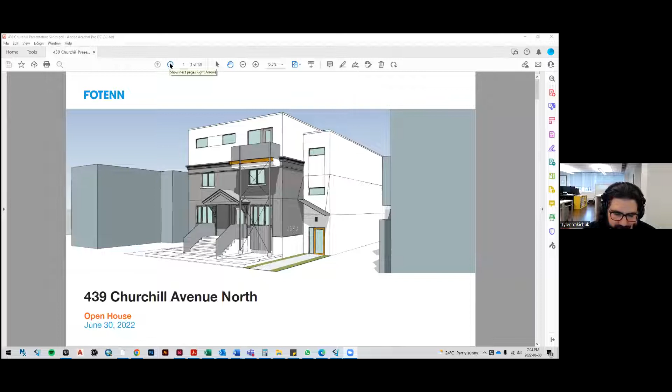Okay, so I'll keep this brief, and considering how few people there are in the room, I'll also maybe skip a slide or two. I'm sure everyone's a little familiar with the context, but okay. So good evening, my name is Tyler Yakichuk. As mentioned, I'm a planner with Fotenn Planning and Design, working on behalf of Grepo Developments. In addition to myself, we have Lisa De La Rosa, also with Fotenn, Chris Benez, our architect, and Isabel DePoe, our developer. I'll be walking you through the planning and policy context, as well as the design for the proposed development at 439 Churchill Avenue North.

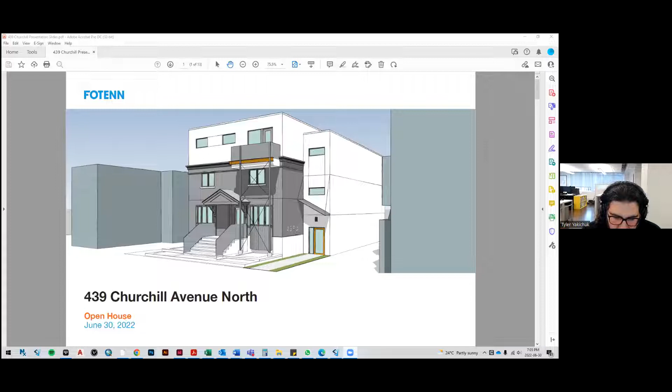The proposed development looks to redevelop the subject property as a 3-story mixed-use building that will contain 4 residential units and 2 commercial units. Those 2 commercial units, which are presently existing on the site, will naturally be retained.

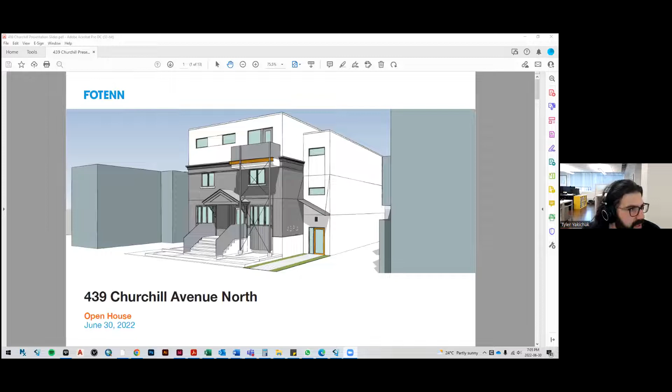So I will quickly go through our context. The property fronts the east side of Churchill Avenue North and has frontage of approximately 15.25 meters. The subject property has an area of roughly 461 square meters and is about 600 meters in radius from the Dominion Rapid Transit Station and 630 meters from the Westboro Rapid Transit Station.

The property is presently improved with a 2-story building containing 2 commercial units and a detached 2-car garage at the rear of the property, which is shared with the abutting neighbor to the north. In addition to the garage, 3 more stall parking spaces are available at the rear of the building presently.

The property directly to the north of 439 Churchill has recently been approved for site plan control to develop a 6-story mixed-use building. The side of the proposed development that abuts the north lot line to 439 Churchill includes no balconies and will be, among other things, a servicing and garage area for the new project. In other words, there will be no privacy concerns for either development.

The property to the south is a mixed-use building that includes commercial at-grade and additional residential uses at the rear of the property, which is not unlike what we're proposing this evening.

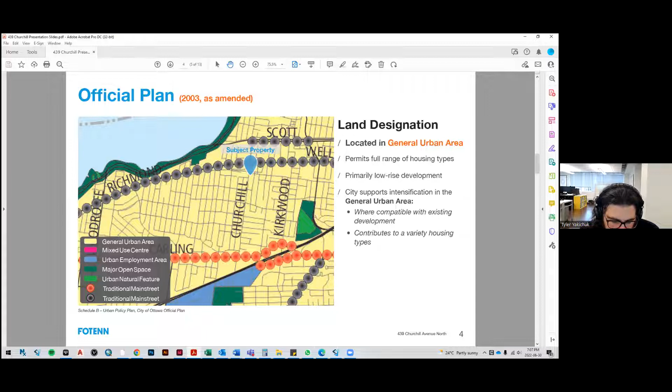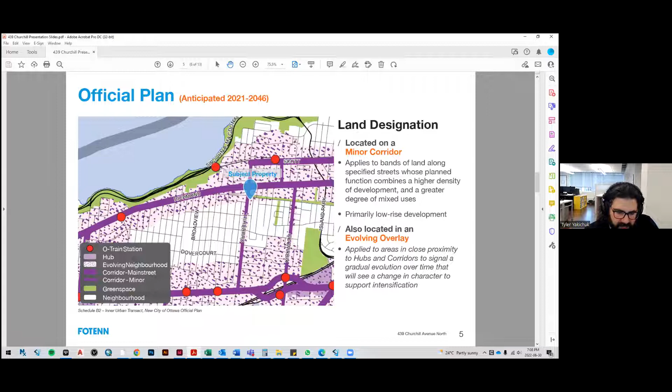However, specific relief from two built form provisions will be sought at the Committee of Adjustment. That relief will be discussed on the next slide.

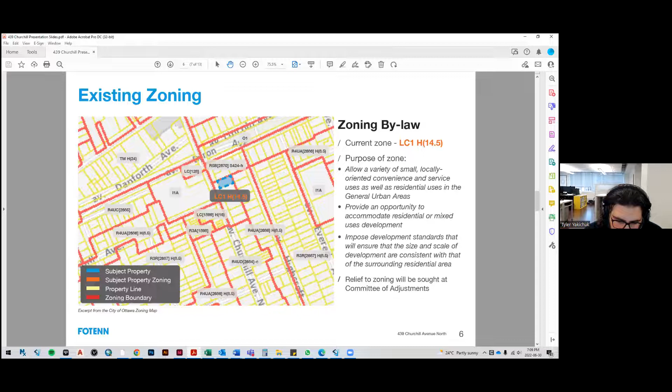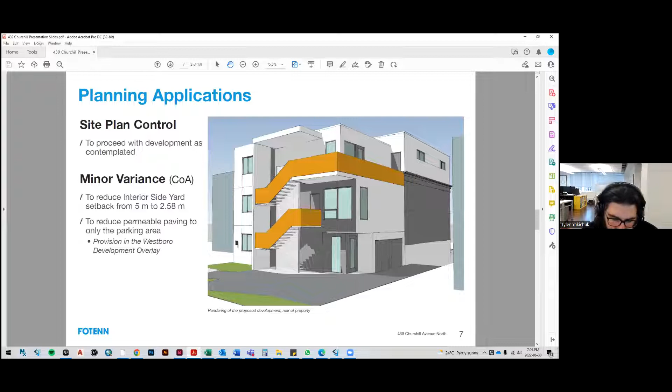The planning application we're here to discuss tonight is specifically the site plan control application to build the proposed development as conceived. In addition, after receiving our first round of technical comments from the city today, we will engage the Committee of Adjustment for a minor variance to reduce the interior side yard setback and reduce the provision requiring the entire paving surface to be permeable. These variances will be discussed a little later.

So the proposed development. Here's a site plan for the development. We are looking to redevelop the property as a 3-story mixed-use building. The building will collectively house the existing 2 commercial units, as well as 4 new residential units. This will include 3 units at the rear of the property, as well as 1 above the existing commercial units. Included will be 2 parking spaces and 7 bicycle stalls.

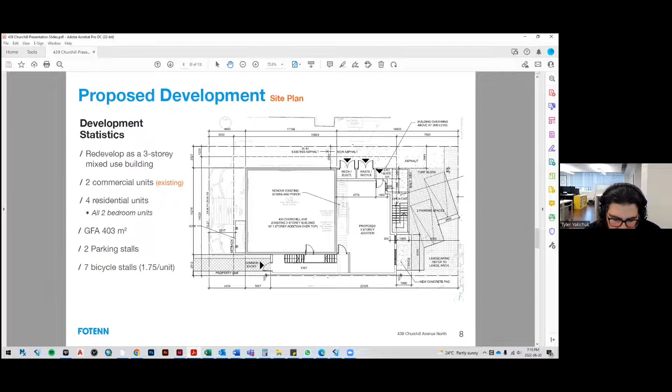Looking at the elevation drawings, you can begin to get an understanding of what the redevelopment will look like. First, the west elevation viewing from Churchill - you can see the additional story on what the existing building will look like, as well as the new balcony. On the east elevation, showing the rear of the property, you can see the rear entrances to the units, as well as the balcony spaces each unit has.

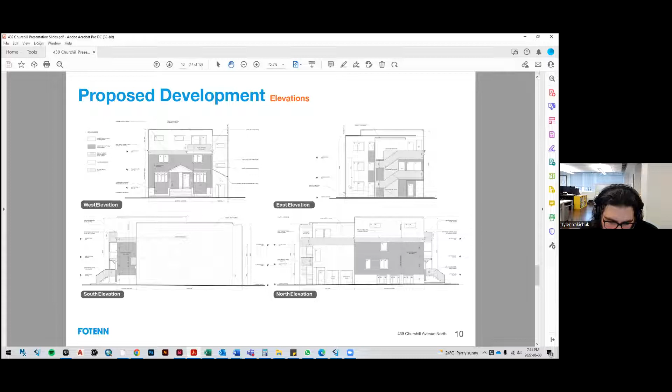On the north elevation, which is the side that abuts the property proposed with a 6-story development, you can see where the servicing doors are located. Finally, on the south elevation, which abuts a neighboring mixed-use building, you can see there are no windows, so as to retain privacy for residents of both buildings.

So back to the relief we are ultimately seeking at the Committee of Adjustment. As mentioned earlier, we will be seeking relief on 2 provisions: a reduction of the interior side yard from 5 meters to 2.53 meters, and a reduction in the required permeable surfaces. We believe the reduction in the side yard setback is appropriate, given that it's an existing condition and that both this development and the proposed development next door have limited any potential privacy concerns between the two buildings.

With regard to the permeable surface provision, the drive aisle leading to the permeable surfaced area in the rear is the only non-permeable surface on site. We believe this reduction is appropriate, as a great effort was put into retaining water on site, and the proposed landscape plan would broadly achieve that goal.

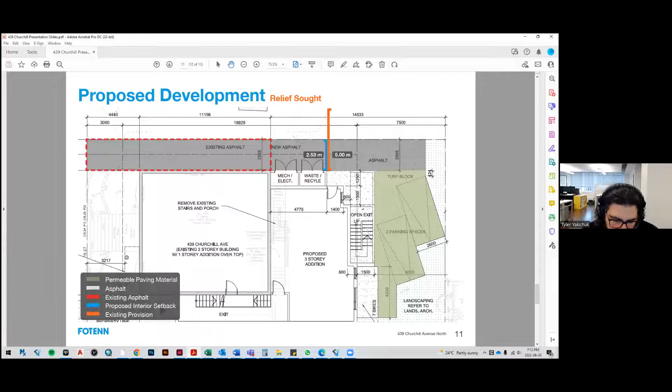So that is our presentation, and we'll be happy to answer all the questions you may have. Thank you.

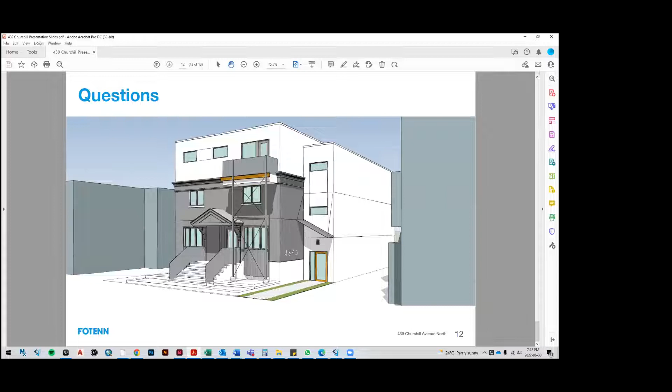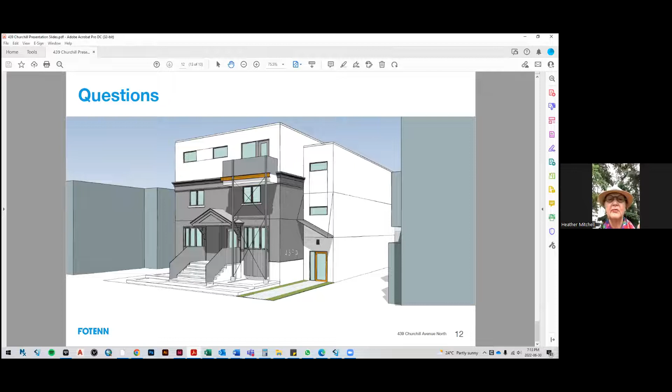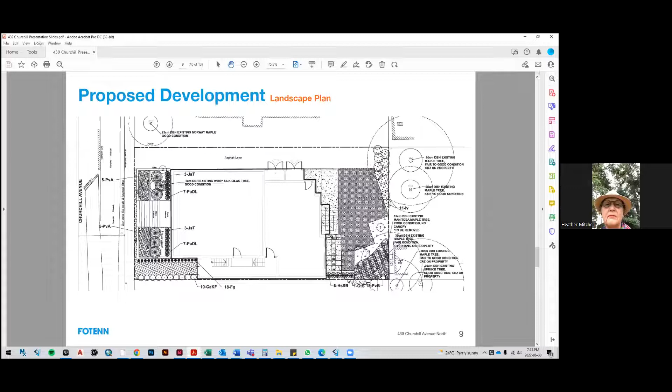I can also speak for a bit and ask for some clarification if you need some time. No, first of all, can you hear me okay? You're good? Yep, we can hear you. Okay, that's great. Tyler, can you show me - I guess we're most concerned with where it abuts the neighbors on the east side, behind the building. Do you have a view of that? I guess this might be the best image showing that, or if you go to the photo we have of the street view, I think you could see the existing building.

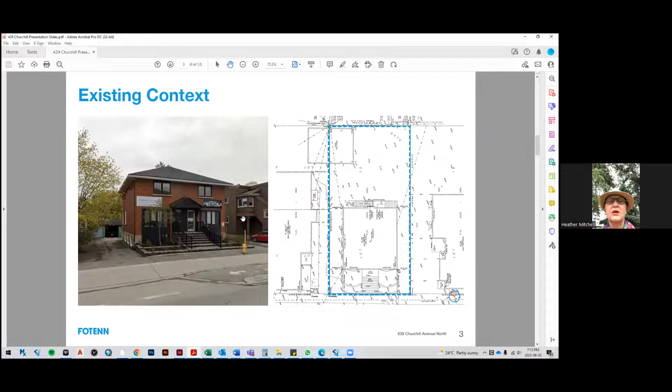If you go down one, the next one down, you see the existing building on the east side. You're not looking at the north side where the 6th story is, you're looking for the one on the south side. I want to see where the building abuts with neighbors on Highcroft, at the rear of the property. Yeah, that's the one.

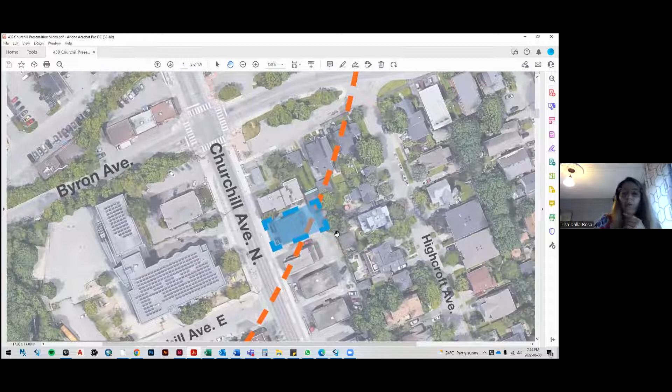So you don't have any renderings for that? Nothing. We have a rear elevation, but we don't have something that shows it other than the landscape plan, which is a sort of schematic from the air. Okay, because that would be really helpful to envision what neighbors are going to look at.

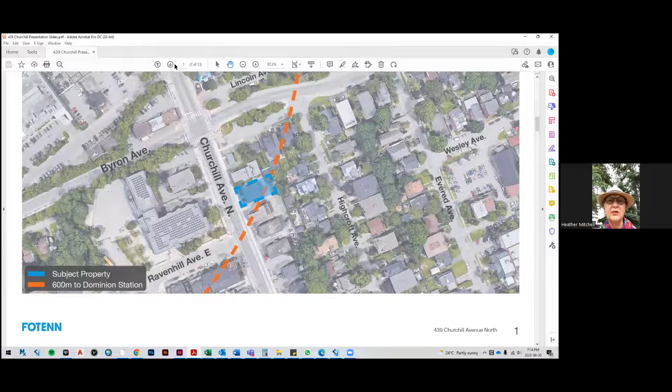But what I was hearing from you is that you're going to retain some trees and some greenery in the back there. Yeah, the existing trees are not being touched. Going back to the landscape plan, if you go back up one, right here you can see 1, 2, 3, 4, 5 trees that will offer some privacy.

Yeah, I've stopped my video because I'm pinching it open and I don't want you to see my nostrils.

So yeah, that's what I thought, that looks good. Trust me when I say there are 5 larger trees that should offer pretty good privacy. The canopies look to roughly cover the majority of the building.

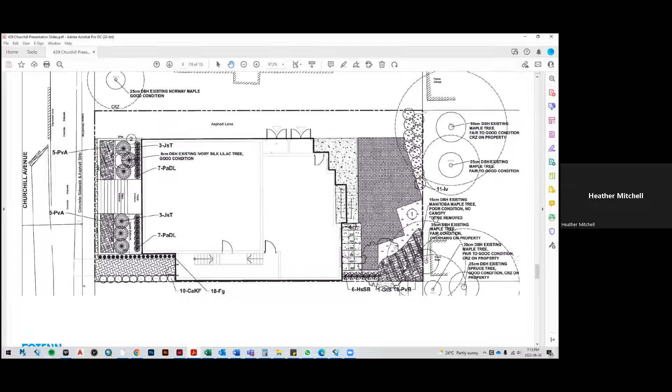And since this is already asphalted and the neighbors would be used to this building being commercial anyway, we are respecting the rear yard - there's no setback reduction with that addition coming into the back. The permeable parking, as much as it's part of zoning, is something the developer is very keen on doing, just because it will help water get to those trees more than the current asphalt does now.

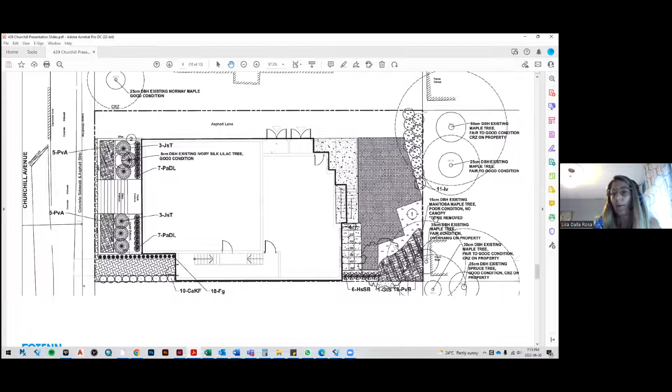The developer is here now, and the intention is for those parking spaces to strictly be for the commercial tenants. The apartment units would not have parking, so those spaces would be more on a temporary basis for people with appointments at the commercial space or for employees. So the idea is that it wouldn't become a parking lot 24/7 in the back there.

So for the residents, how many apartments? There are 4, and no parking, so they're going to be using LRT, and then there's 7 bike parking spaces added. Oh good, that was my next question about the bike parking.

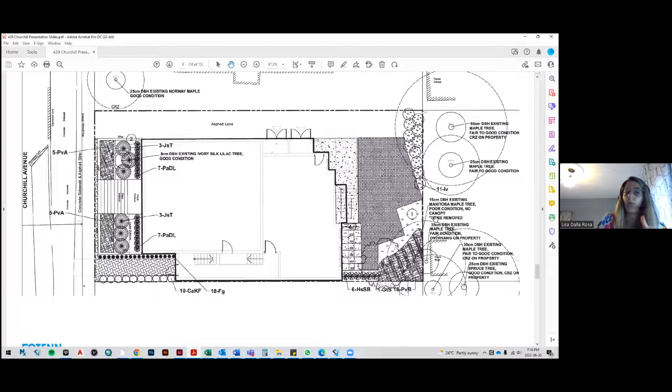The garbage is on the side of the building, abutting your neighbor there, and it's enclosed as part of the building - it's built in, so it will be rolled out, but it's internal to the building and not just a bin in the back that's fenced or something.

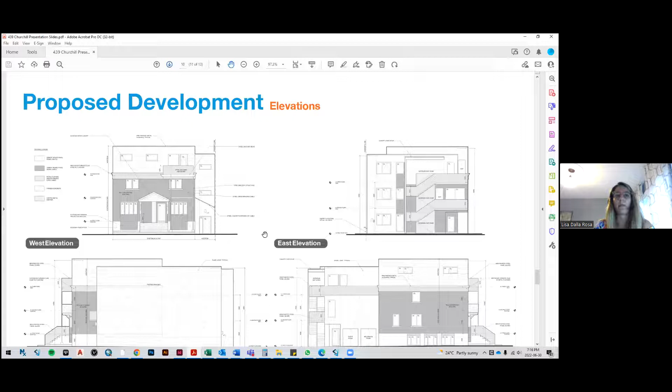And you've told me there's no rooftop terrace, no balconies, again for neighbors on Highcroft? No, there's not - well, actually if you go to the elevation, one up maybe, yeah, the back - I guess this east elevation is what's happening in the back. So there are balconies and staircases in the back that would back onto that Highcroft property.

But with those trees at the back as well, it's only one tree being removed, so that canopy is going to be mostly intact. Okay, no, that sounds good.

No, but this is very important. Also, if you're going to committee of adjustment, that's another opportunity for us to wave this around some folks and make sure they're comfortable with it. Just so you're clear on what the minor variances are that we're asking for, it's the interior side yard as well as the permeable pavement component. We will make this presentation available.

Personally, I don't see any red flags here. I can't see that the committee of adjustment will have an issue with this, but you never know with these guys sometimes. Sometimes they're on the neighbor's side, sometimes on the developer's side, and sometimes on their own side. They're all wonderful folks and I respect them very much. But this all looks good to me.

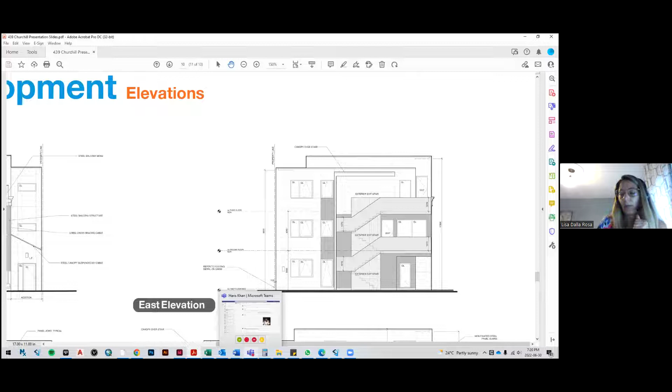One of our board members is in touch with the neighbor directly behind, so I'll make sure the other two neighbors behind and on the other side know what's going on. As long as they're comfortable, I'm comfortable. So that's it.

And just to clarify, if you don't mind me asking, Lisa and Tyler—for the permeable sort of road, Tyler, I think you're still sharing your screen here. Oh yeah, shouldn't be looking at my email. Let's see, sorry. I wasn't sure who was sharing, I thought it was you. Sorry, go ahead, I didn't mean to cut you off, Steph, I wasn't sure what Tyler was bringing up.

It's all good. But just to clarify for anyone watching who might not understand, with the Westboro overlay and those permeable roadways, it's because the asphalt is already there and being taken into consideration—that's why you're asking for that relief.

There's an extension—we're extending the pavement slightly, because right now the pavement goes essentially to the garage in the back. Where we're adding or redoing the parking spaces, that will be a permeable surface, but the existing pavement we're not going to rip up and put permeable down right now. As the developer noted, as asphalt needs replacing over time, the idea would be to replace it with something permeable after wear and tear happens, but there's no point ripping up functional asphalt now. But the zoning requires it to be permeable, so that's where the variance is needed.